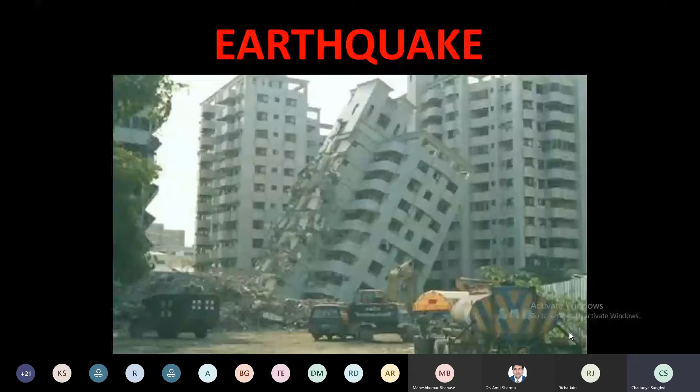So first we start with the disasters. We came across lots of disasters, and during this training program you will be given many lectures on different disasters. We talk about earthquake, cyclone, flood, fire, landslide, liquefaction, tsunami. These are the disasters. We can list them out as either man-made or natural, right?

Most of the time we say that earthquake is a natural disaster, right? But if an earthquake hits your region, what exactly will you do? When earthquake hits your region, you will come out of your houses, your offices, your structures. So you try to come out of your building. What is the reason behind it? The reason is that we have a fear in our mind that the building will collapse and casualty may happen.

Where do you go? You go to the open space. This open space is nothing but nature. So if we say earthquake is a natural disaster, definitely you will not approach nature. Just imagine if a cyclone hits the region, what exactly will you do? When cyclone hits the region, you will remain in your house, right? Because cyclone is a natural disaster, you will wait some time until it subsides, and then move out, because cyclone is a natural disaster.

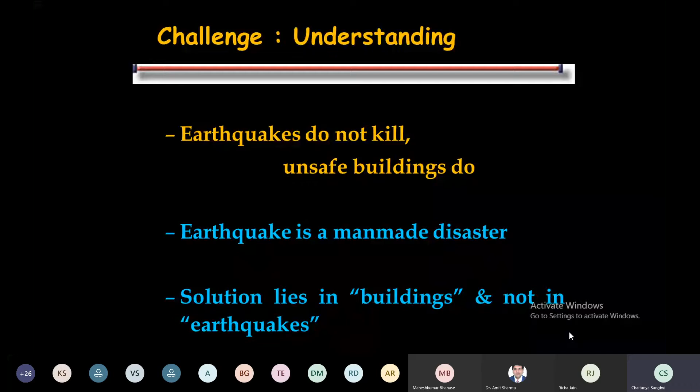So we have to develop the understanding that earthquakes do not kill, but unsafe buildings do. So we have to focus on the building, make our buildings safe, and reduce the casualties, right? And if you look at all the disasters, you will find that among them, the maximum loss of life and maximum economic loss is observed during earthquakes, and therefore it is very important for us.

The reason is we can predict flood. We are able to predict flood, and therefore, before any event happens, the people go to safer places. But at the same time, their property cannot be prevented from the flood, so their property may be affected - economic loss is higher, but loss of life is less.

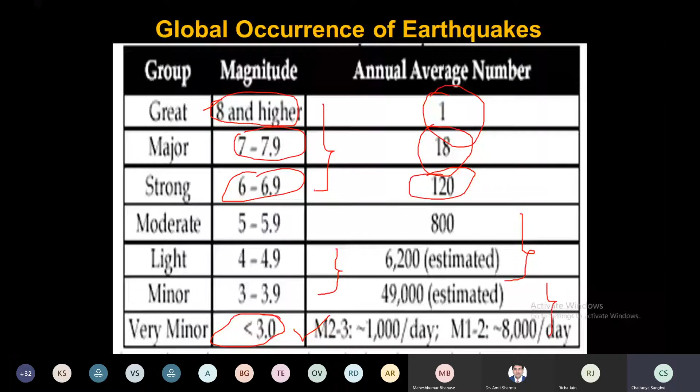But we are not worried about these earthquakes. The reason is the amount of energy released in these is very less, and our structures are able to absorb that energy, so we are not worried about small earthquakes. We are not much worried about the moderate earthquakes either, but we are worried about those whose magnitude is more than 6. So basically, we can conclude from the global occurrence of earthquakes that big earthquakes are rare, moderate earthquakes are occasional, and small earthquakes are frequent.

Suppose I'm taking a very simple example, when we design our structures for a certain period of life. For example, we design our structures for 100 years. Now I'm taking a simple example of a building located in the Bhuj region of Gujarat. I'm talking about the Bhuj earthquake or the Kutch region. Kutch is in Gujarat, right?

And I'm talking about two buildings or two structures. One is constructed in 1818, and another in 1820. We know that there was a great earthquake in Kutch in 1819, and as far as this region is concerned, the next earthquake took place in 1956, Anjar. So the gap between the two successive earthquakes in this region was almost 130 to 140 years.

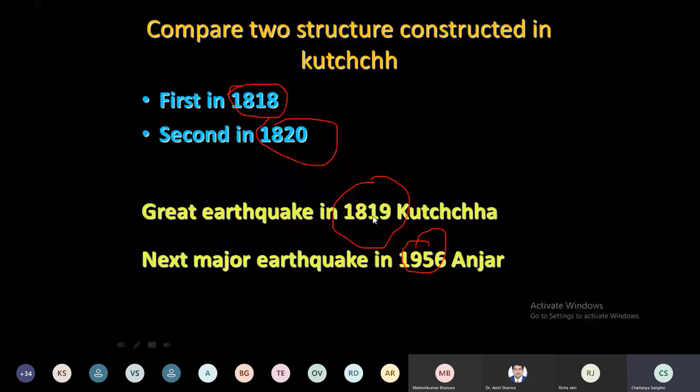Now we are taking the two structures: one constructed in 1818, another in 1820. Assuming a life of 100 years, the first structure constructed in 1818 will expire in 1918. Now if you look at how many earthquakes it observed, we know the earthquake took place in 1819. It means the building constructed in 1818 observed a great earthquake immediately after its construction.

So if we ask this building what we should do as far as earthquake design is concerned, it will say you have to go for the earthquake-proof design. Earthquake-proof means no damage condition, no damage. It is safe, but this is uneconomical because the sections are very large, our structural elements are much bigger. So as far as structural elements and cost are concerned, our structure becomes uneconomical.

Suppose I take the other structure, constructed in 1820. This structure will expire in 1920. How many earthquakes did it observe? Because we know we had an earthquake in 1819 and the next earthquake was in 1956, during the life of this structure it has not seen any earthquake.

So if we ask this building what we should do, the building is not knowing about earthquake, so it will say there's no need of designing the structure for earthquake because this building has not observed any earthquake. But if we do this, then when an earthquake comes—because we are not sure whether it will come or not—when it does come, it will also collapse, and it is unsafe. So as a civil engineer, we never design unsafe structures.

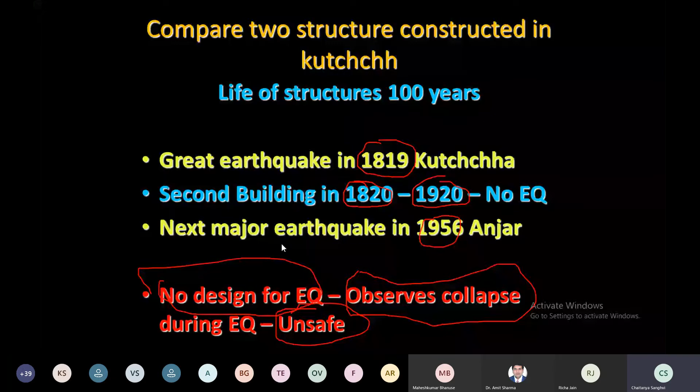So we have to go for earthquake-resistant design. Earthquake-resistant design means damage is expected. Suppose we cannot say my building will not see any earthquake. If we take the case of the Gujarat earthquake, we had an earthquake in 1819. The next earthquake was in 2001. That means almost 180 years gap between the two big earthquakes. Now if I imagine that the next earthquake is going to come after 180 years, no, that is not correct.

The whole earthquake engineering is based on probability. The probability means an earthquake may come tomorrow morning also. You have to be ready for that. But the probability of having a big earthquake next morning is very less. And therefore we are taking the chance. We are making our structure safe, but at the same time we are expecting damage.

Damage means what? If an earthquake comes, damage takes place, and then we have to retrofit that building or we have to repair that building. So we have to imagine that if an earthquake comes, a big earthquake, then we have to repair or retrofit our structure. That is what is required. So this is what the philosophy is.

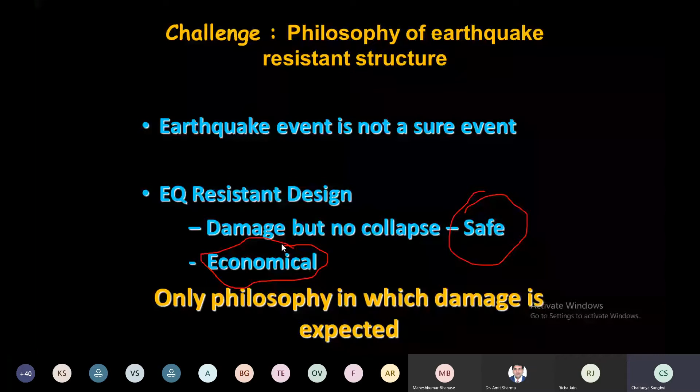In case of a minor earthquake, we are expecting damage in non-structural members, not in the structural members. In moderate shaking, we are expecting some damage in the structural member and heavy damage in the non-structural member. But in case of strong shaking, we are expecting very heavy damage in the structural members. Remember, we are expecting more damage in the structural members.

But collapse is not allowed. This is the bottom line. Collapse is not allowed under any circumstances. Remember, this is the bottom line.

So if you look at the philosophy of earthquake design, it simply says that under minor but frequent shaking, we generally observe non-structural damage, not structural damage. Structural damage means damage to members which transfer loads of the structure, which are designed to resist loads. Non-structural members are used for functional purposes. Like in an RCC structure, the load of the slab transfers to the beam, the beam transfers load to the beam-column joint, then column, then foundation, and to the soil.

The non-structural members are the walls. Generally, the walls are used for the functional purpose. They are infill walls. The purpose is not that they will take the load.

So under minor shaking, which is frequent, we expect repairable damage in the non-structural member. Remember, non-structural member, but no damage in the structural member. But when an earthquake of magnitude maybe 4 to 6 comes, then there may be damage in the non-structural member and repairable damage in the structural member.

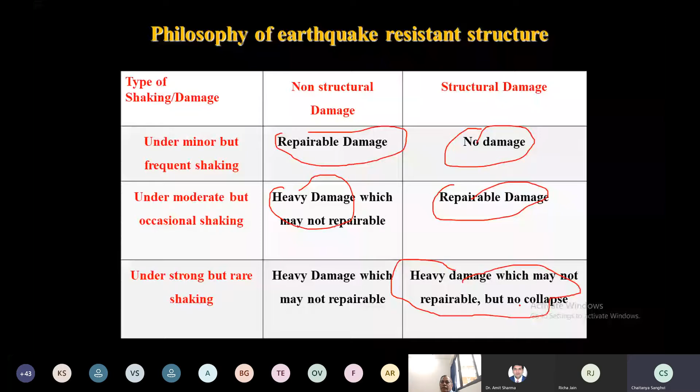So the difference between earthquake-proof design and earthquake-resistant design is that in earthquake-proof design, we design our structure for the maximum expected force and for the no-damage condition. Here we rely on elastic deformation. It is safe, but it is uneconomical.

Here ductility is not required. But in earthquake-resistant design, we design for maybe 20-30% of the force, and we rely on inelastic deformation. We design our structure such that it will absorb the earthquake energy. So we are relying on inelastic deformation, which means ductility, and ductility definitely relates to damage.

So here your structure is basically safe. Remember, the structure is safe, but at the same time it is economical. The only thing is that you have to be ready for retrofitting in case of major earthquakes. That's all - this is what we discussed as preliminary things.

If you look at the actual scenario of what happens in any earthquake, whether in a developed country or developing country, buildings collapse. In developing countries, more buildings will collapse; in developed countries, fewer buildings will collapse.

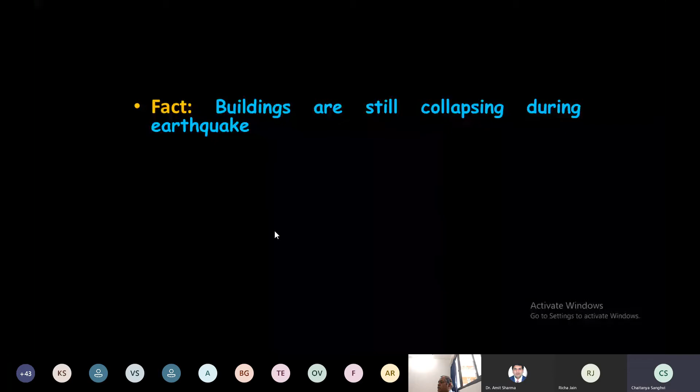In developing countries, the number of deaths will be high compared to developed countries. This is generally observed, whether it's the 1994 Northridge earthquake, the 1995 Kobe earthquake in Japan, the 1999 Turkey earthquake, or the 2001 Bhuj earthquake. Everywhere we have seen devastation, more so in cases like Turkey and India.

If you look at Japan in 1995, most of the bridges were affected, and in the 1994 Northridge earthquake, it affected structures too, but quite less compared to India.

So now we come to our main topic. Earthquakes are uncontrollable - this is a fact. We cannot control or prevent earthquakes from happening, and at the same time seismicity is increasing. So we have to design our structure such that capacity is more than the demand. Then your structure remains safe.

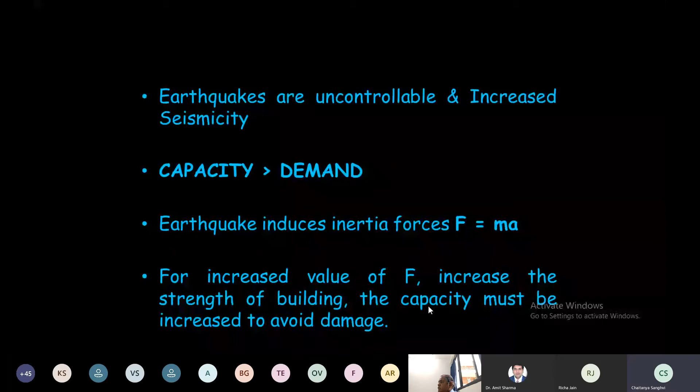We know the earthquake induces force, which is mass into acceleration. So if the value of F increases, meaning earthquake force increases, we have to increase the strength of our structure and design it for a higher level. So we have to increase the capacity - capacity should be more than demand.

So there are two things. Again, capacity means whether we go for elastic design or inelastic design. We rely on elastic deformation or inelastic deformation - which is more important? Here we basically rely on inelastic deformation, and here we are not observing strength-based design, but rather we rely on ductility, meaning the area under the curve.

We calculate the forces like this as far as the Indian code is concerned. We calculate the design lateral force at each floor level, and then we design our columns or our supporting system for that. Now, basically, this earthquake force acts in all three directions - two horizontal directions and one vertical direction. Now which component is important for us?

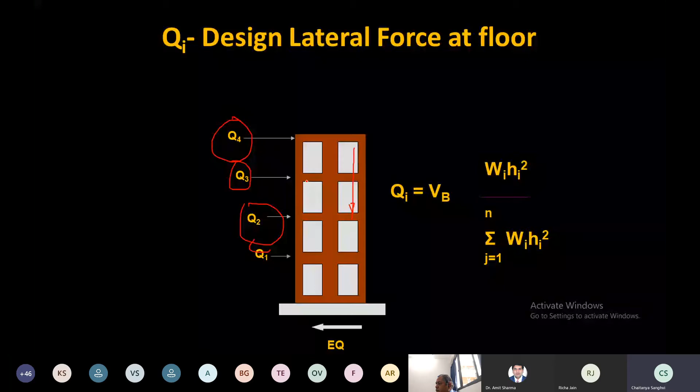The important part is, we have to transfer horizontal load in vertical direction, and therefore your structure is uncomfortable. Imagine you are holding a bag on your head, you are comfortable, right? But suppose you are holding your bag by keeping your hand at 90 degrees with your body, then you are uncomfortable because we are transferring force in a very awkward way.

So here the same thing: this force is acting in the lateral direction, and we have to transfer it in the vertical direction. Therefore your structure is not comfortable because our load transfer member is located in the vertical direction.

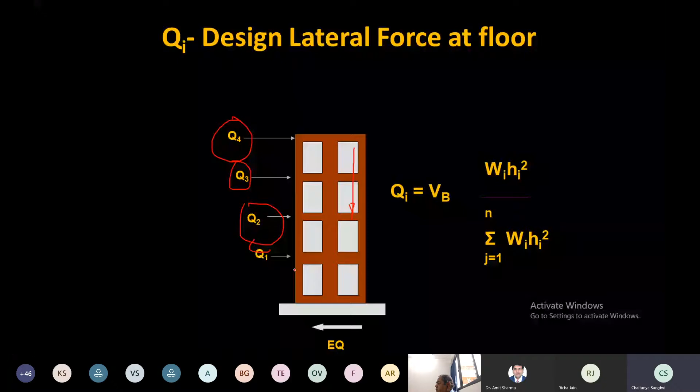Now, which are the lateral load resisting systems? Generally we rely on shear walls, bracing systems, MR frames, and tubes. These are the normal lateral load resisting systems we use.

What is a shear wall? The shear wall is basically a structural wall. But we are saying it is a shear wall because the structural wall may be a shear wall or a flexural wall. The shear wall means the design of this wall is governed by shear deformation, not by flexural deformation.

In most cases, if we put a shear wall, it means it's a vertical concrete wall with reinforcement in the vertical direction. The shear wall is a wall designed to resist the lateral force acting in its own plane, and shear deformation is the main thing we are designing for, not flexural deformation.

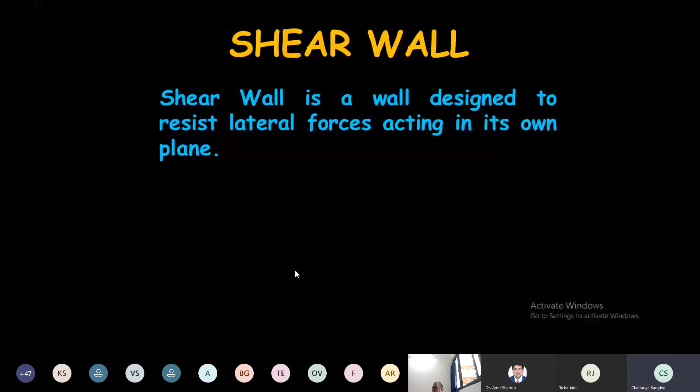This you are knowing, I'm not going to discuss that part, but this is shear wall reinforcement. You can look at the shear wall, how it is constructed after the earthquake. This structure was damaged due to the earthquake, and later they introduced a shear wall in the existing structure. You have to be very careful that this shear wall must be connected with the columns and beams correctly, then load transfer will take place. Otherwise it will not become effective.

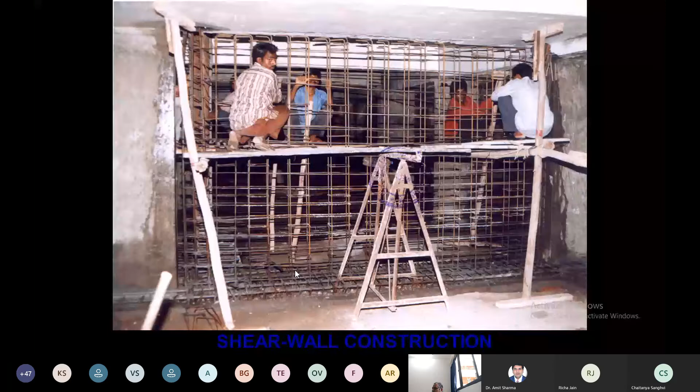The bracing system can be used to stop a building from swaying over. Generally bracing is provided in steel structures; in concrete structures we provide shear walls. The purpose of both bracing and shear walls is to increase stiffness and make your structure stiff. Since earthquake load distribution is as per the stiffness of the vertical element, we try to prevent larger deformation.

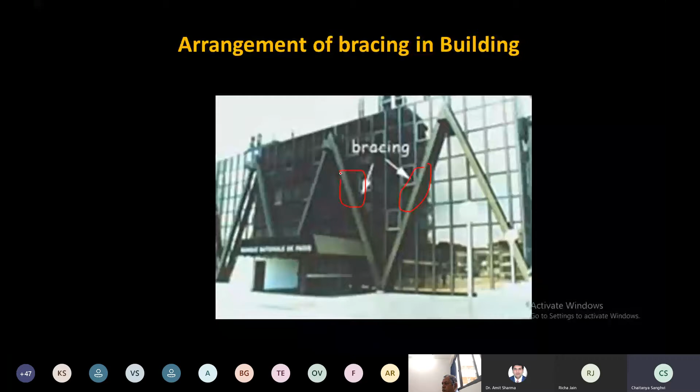So bracing systems are provided, where the members are either in tension or compression. This is a bracing system which is provided. Earthquake force is acting in the lateral direction, and we are providing an element which is inclined. This inclined member will transfer earthquake lateral force much better as compared to the vertical member. This is a bracing system. We have special concentrically braced frames or eccentrically braced frames, depending on the case.

So we are saying that earthquakes are natural, and as far as the effect of earthquake is concerned, we have to control the damage in the structure. We have to control the consequences, because of our technological advancement.

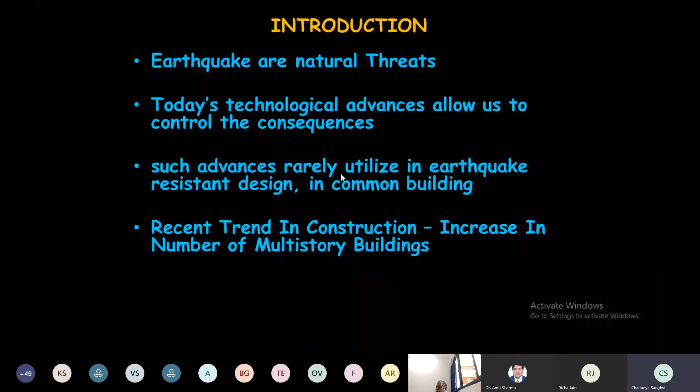If you look at the recent trends, we are going for very high-rise multi-story buildings. The governing equation is inertia force plus damping force plus stiffness force - this is the case of free damped vibration. Now, if you want to control the excessive vibrations, generally we increase the stiffness.

And correspondingly, the mass may increase, which is generally not feasible for tall structures. So to reduce excessive vibration, we switch over to damping. If there is more damping, it will absorb more energy.

So basically, if you want to control vibration, we have three parameters: mass, damping, and stiffness. You can reduce the mass because we know earthquake force is mass into acceleration. If you reduce the mass, earthquake force will reduce, so if you make your structure lightweight, it is good - earthquake force will reduce.

The second part is you increase the stiffness, so the deformation may be controlled. But when you increase the stiffness, the size of the vertical member becomes very high, so again we have to control the sizes of the structural elements.

And the third element is damping. Damping is very important, and you have to increase the damping. For steel structures, we assume 2% damping. If it is an RCC structure, it is 5% damping. If it is masonry, it is around 8%. This is nearby what we assume - so the masonry structure absorbs more energy compared to steel structures: 2% damping in steel, 8% in masonry, 5% in RCC.

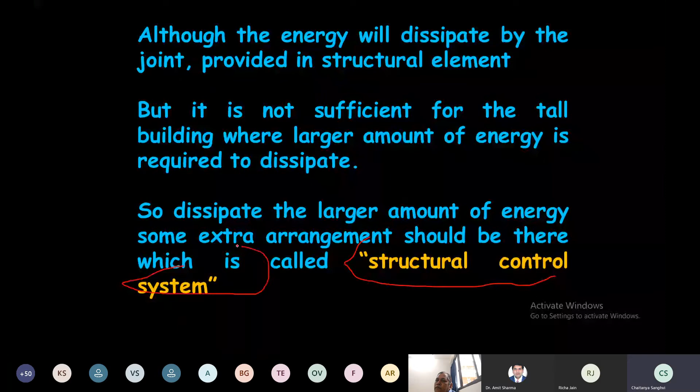This is structural control devices, or structural control systems, which are required. So what are structural controls? They mean incorporating external elements into the structure to control the dynamic response - we are introducing new structural components into our structures which will control the dynamic response, meaning when an earthquake comes, it will control the vibrations.

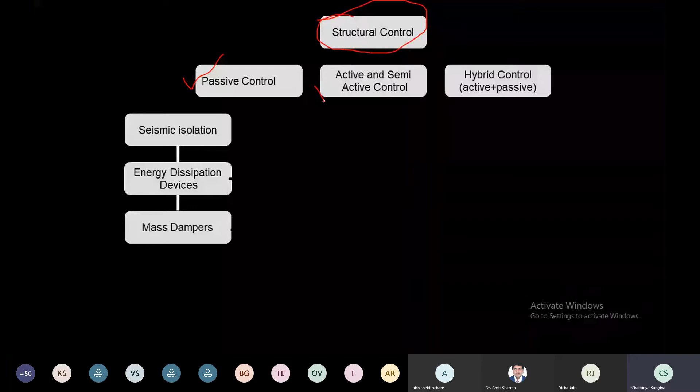And which type of structural controls are we talking about? There are different types: passive control, active or semi-active control, or hybrid control.

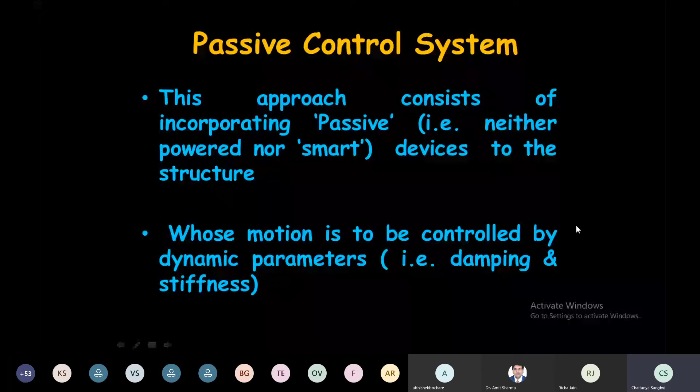And we are playing with the damping and stiffness - basically we want to control the vibration. So passive control requires no external energy; energy is not required. We are putting in structural elements, and we have to select a structural element, or introduce an element, according to the situation. We'll see exactly what it is.

So first we talk about the base isolation system. Base isolation system - what is base isolation?

We go to the behavior of our structures during earthquake. During earthquake, what is happening? Energy will release, and this energy will travel in form of waves. These waves will shake the foundation. When the waves shake the foundation, your structure is basically at rest. As per Newton's law, a body at rest will try to remain at rest, so it will exhibit the inertia force, and this inertia force is the earthquake force.

So when earthquake shakes the foundation, your building will vibrate in horizontal and vertical direction. Here we are talking about the horizontal, lateral direction. This energy is entering into your building, and your structural components undergo deformation, but this structural component has limited deformability - it can deform only up to a certain limit. If it deforms more than that, damage will be observed.

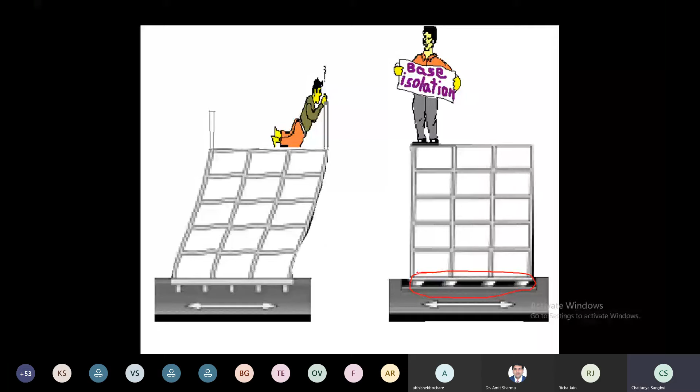So what is actually base isolation? We'll discuss that. If you talk about high seismic zones, we can observe acceleration more than 1G. Designing our structures to this level of force is not easy or cheap. Therefore, as far as our code is concerned, it basically uses ductility to reduce the capacity and to achieve the capacity.

So as far as our code is concerned, it relies on ductility. Which code am I talking about? I'm talking about the IS code, IS 1893. IS 1893 is having five parts right now. Part one is for buildings - I'm talking about buildings right now, not discussing bridges, embankments and others. But the most important thing is that IS 1893 part 6 is coming.

The draft code is there, and this is particularly related to the base isolation system. So India is ready for the base isolation system. The code is already there, and maybe within a year or two we'll have a code for base isolation even. Right now, if you talk about IS 1893 parts 1 to 5, basically they talk about ductility to save our structures.

But I told you earlier that ductility means what? Inelastic deformation - what is inelastic deformation? It's nothing but damage. It means once a big earthquake comes, your structure and elements will absorb damage, and when your structural element absorbs damage, its capacity will reduce, and then you have to retrofit your structural elements. Therefore, if we want to prevent our structural elements from undergoing damage, the solution to this is basically a base isolation system.

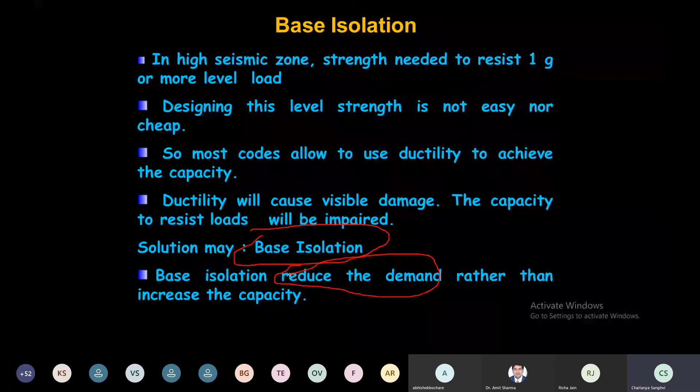Again, for earthquake we are designing our structures to absorb - basically we are designing structures such that they will absorb the earthquake energy. Our earthquake design is not a strength-based design. Remember, I'm repeating - our earthquake design is basically based on energy absorption. And here, the base isolators are reducing the demand rather than the capacity.

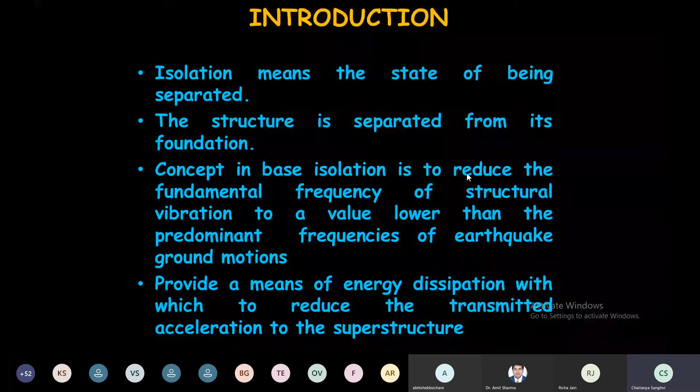So what is the purpose of base isolation? We know that hospital buildings, school buildings, fire stations, institute buildings, TV stations - these are very important buildings, known as lifeline structures. This structure should remain working during the major earthquake event, and it should remain functional after the earthquake. This is important, and therefore base isolation is important.

Reduction in seismic force is very important for us. As far as base isolation is concerned, it reduces the seismic force as compared to conventional structures, and it is said that almost 60 to 70% force can be reduced using base isolation. It means the demand is reduced. So the objective is to protect structures from severe damages during strong shaking.

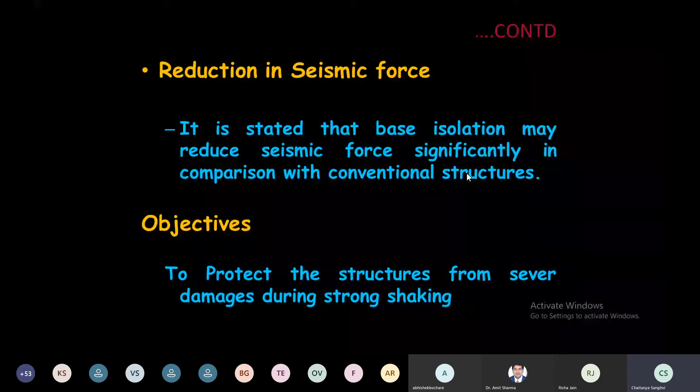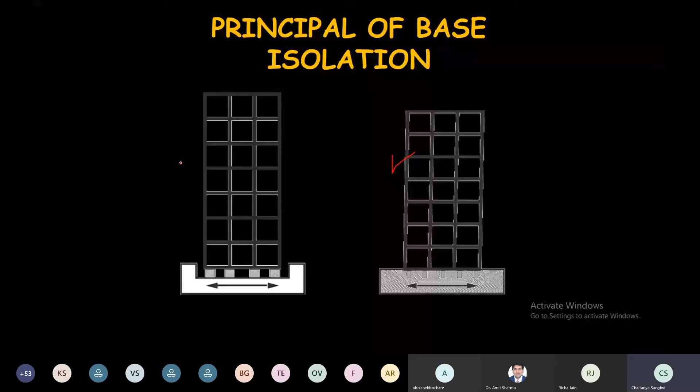Now you can see how the structure is vibrating. This is very important. Here you can have an interstory drift. In this case you have an interstory drift, while here the interstory drift is gone - it is not there at all. So this is the advantage of the isolators.

Again, in the first case you have an isolator here, and because of the isolator, the superstructure almost has rigid deformations. While in our normal structures, if you look at the interstory drift, you can observe these two parts. Just look at this - this is very important.

So basically, what is an isolator? It consists of a setting device which is flexible in the horizontal direction and very stiff in the vertical direction, because we have to make this isolator in such a way that it will transfer the dead load and live load quite effectively. Since they act in the vertical direction, they must be stiff vertically. But the earthquake lateral force acts in the horizontal direction, so it must be flexible - we allow deformation in the horizontal direction. It is located between the foundation and the main structure.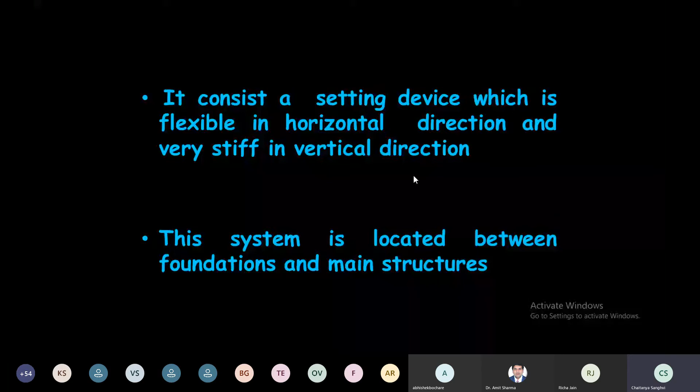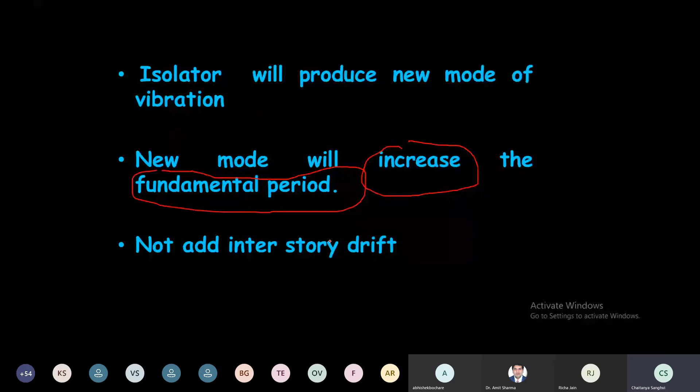So what are the advantages of base isolation? Basically, you are separating the frequencies. What is resonance? Resonance means the frequency of the earthquake matches the frequency of the structure, and then resonance occurs - meaning your structure gives a larger response. Simple: if you like ice cream and I offer you ice cream, your response will be high. Same way, if the earthquake supplies the same frequency as the structure, your building will respond greatly. By using this base isolator, we are separating the frequencies, avoiding resonance.

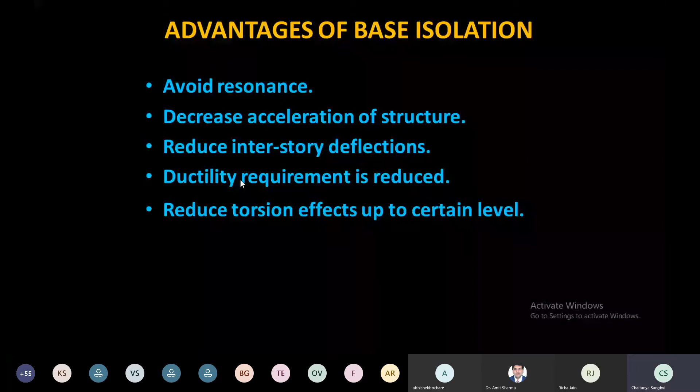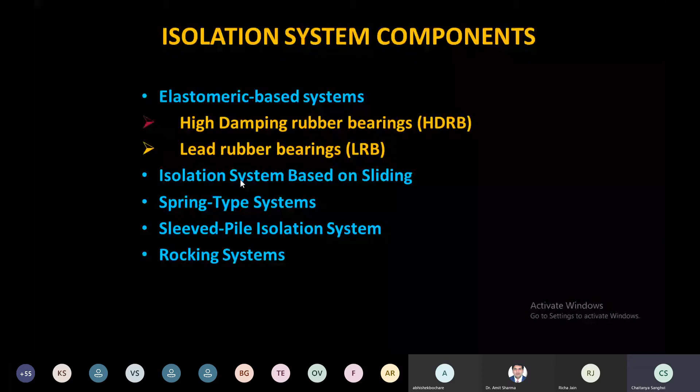Basic element of flexible mounting or energy dissipator - we'll see that part. Basically, the type of isolation system - we have different types of systems. We have elastomeric based systems like HDRB or LRB, meaning high damping rubber bearings or lead rubber bearings. We have isolation systems on sliding base, spring type systems, sleeved pile isolation, or rocking systems. Various types of isolation systems are available, so we will see this.

This is a system which is very flexible in the horizontal direction, capable of transferring vertical load. So first we talk about the elastomeric bearing, which is the most popular right now.

It consists of thin rubber and steel plates. If you look at this, the rubber layers are inserted between the steel plates. What will the steel plate do? The steel plate will give you stiffness in the vertical direction. It will transfer the vertical load and prevent bulging of the rubber - it literally constrains the rubber sheets. And what will the rubber do? When you introduce the rubber, it allows horizontal flexibility.

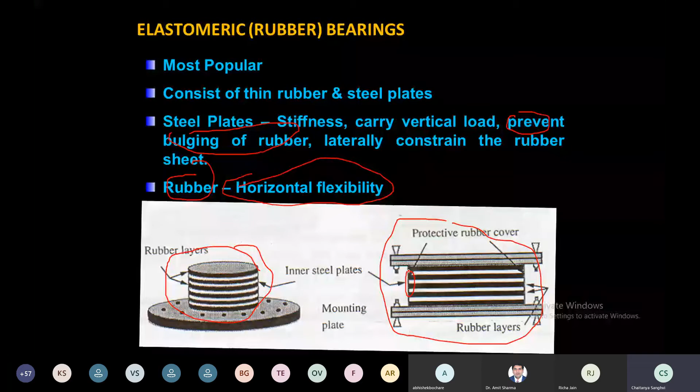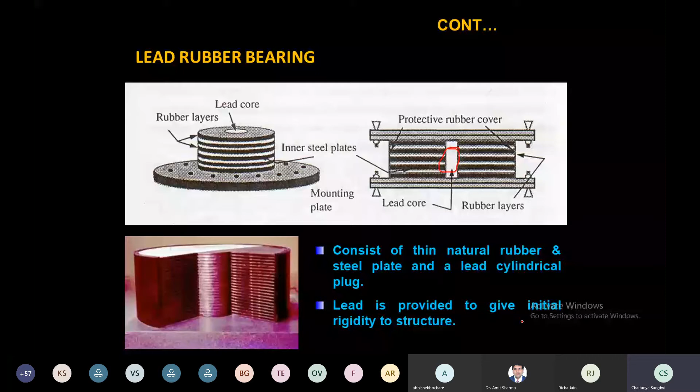The lead rubber bearing means we are using rubber layers with steel plates, but at the center we are using lead. So natural rubber, steel plate, and a lead cylindrical plug. This is providing the initial rigidity to the structure - that is the reason we are introducing it. You can see the better view - these are the steel plates and the rubber, steel plates and rubber here, and the central part, which is the lead, in the lead rubber bearing.

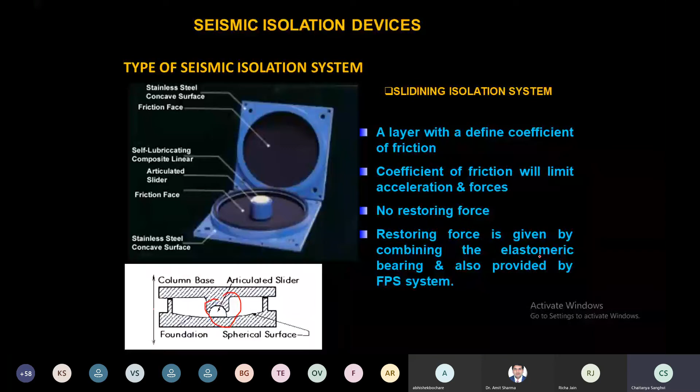We have a different type - the sliding isolation system. In sliding isolation system, you can see here this is the base plate, and this is the column base, and here this is a slider. This is the surface on which it will slide. So a layer with a definite coefficient of friction will limit the acceleration and forces, but here no restoring force will be there. So restoring force is given by a combination of the elastomeric bearing and also by the friction pendulum systems.

The isolation in a real building - if you look at the Bhuj hospital. You'll be surprised that in the 2001 Bhuj earthquake, the government hospital building in Bhuj collapsed. At that time, the Vajpayee government was there, and they sanctioned 100 crore rupees for the hospital, and a new hospital building was constructed in Bhuj. The cost of that hospital building was 100 crores, and out of these 100 crores, 10 crore was the cost of the base isolator - you see, 10% is the cost, which is quite high.

The reason is India is basically using isolators, as far as this building is concerned, from New Zealand, and we are not actually using it effectively. When it comes into routine use, the cost of isolators may reduce. But as far as India is concerned, we have few buildings with such isolation systems - right now maybe 8 to 10 structures in India which are isolated. So Bhuj was the first big structure which was isolated.

Before that, in 1993, there was the Latur earthquake. Latur is in Maharashtra, known as Kilari. So after the Latur earthquake, the first building was introduced in India with a base isolation technique. Today, as far as the world is concerned, we have more than 1,000 buildings in the world which are isolated - a very effective technique, and the performance of these buildings was observed to be wonderful during earthquakes, performing excellently well.

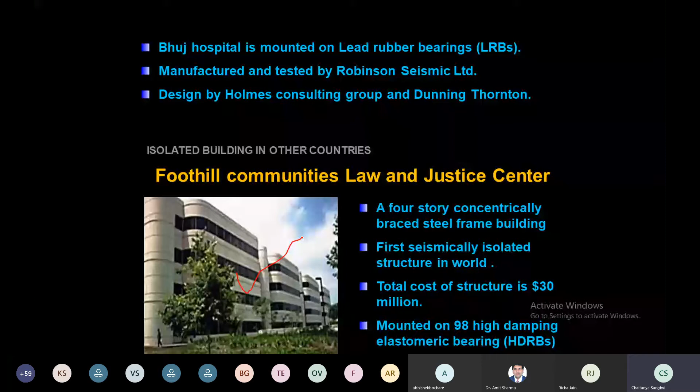This is the Foothill Communities Law and Justice Center. It's basically a 4-story concentrically braced frame. This is the first seismically isolated building in the world. The total cost was almost 210 crores, meaning $30 million, and it is mounted on 98 high damping elastomeric bearings, HDRBs.

We go to the next part: tuned mass dampers. What is a tuned mass damper?

Basically, we are adding certain mass to our structure. We have our main structure, having certain mass. Now, frequency is basically 1 over 2 pi, square root of K by M. So it depends on stiffness and mass. Again, the frequency is 1 over 2 pi square root of K by M, depending on stiffness and mass.

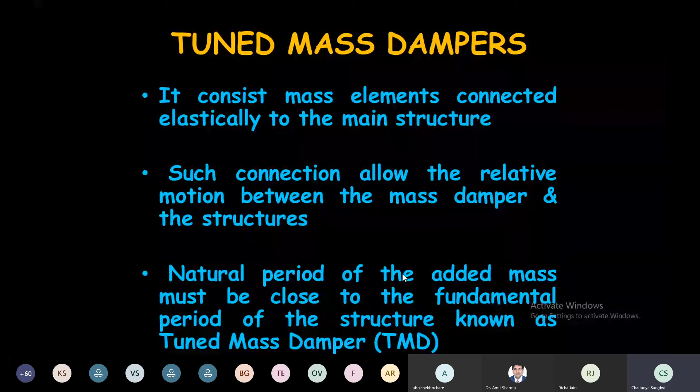So your main structure has certain mass. If you play with additional mass, you can change the frequency of your structure. So what exactly are we doing? We are introducing certain additional mass into the system, and the natural period of this added mass should be close to the fundamental natural period of the structure. So it is called a tuned mass damper. The purpose of a tuned mass damper is to reduce the horizontal vibrations of tall and slender constructions.

Let's talk about damping. What is damping? Damping means the capacity to absorb energy — it's the energy absorption capacity of the system.

And what is a tuned mass damper? A tuned mass damper is a single degree of freedom oscillator attached to the structure for the purpose of reducing resonant vibrations.

What exactly is the system? You see, this is your main structure, and you are adding certain mass to it. It is designed in such a way that you change the frequency of your original structure — you are tuning the mass in such a way.

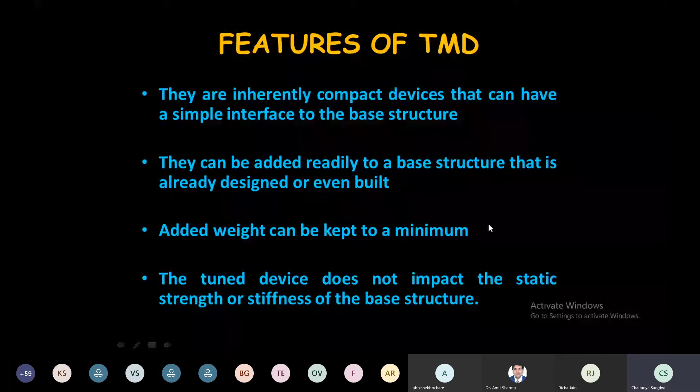Basically, this mass is added to different levels, and this mass is generally kept to a minimum. When we are tuning the mass, it doesn't impact the static strength or stiffness of the base structure. This is the most important part.

Now you can understand what we are actually doing. We have a main structure, we introduce additional mass to change its frequency. So whatever the predominant frequency is, the structure will shift to a different frequency, and they will not resonate. That is the most important part.

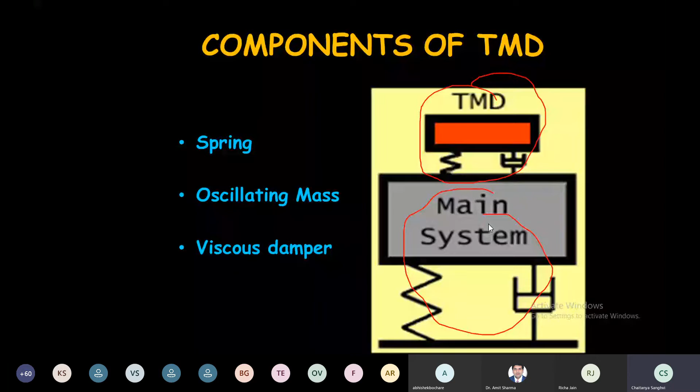So how does it work? You can see here — we are putting additional mass. This is a sketch of our original structure, having certain mass and stiffness.

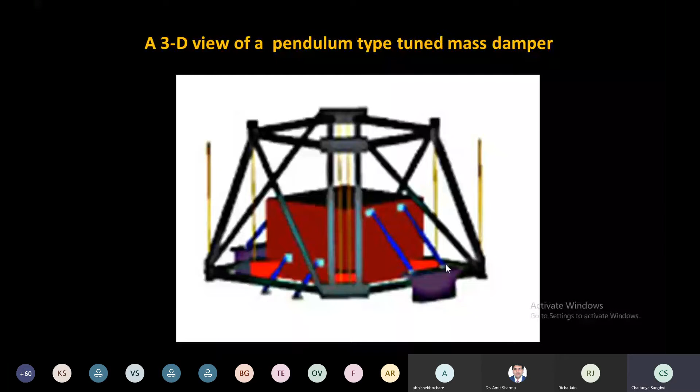You see, this is an actual view of a pendulum-type tuned mass damper that is provided. When the structure vibrates in one direction, the damper goes the other way, trying to reduce the vibration. If the structure moves to the right, it moves to the left, and tries to control the vibration.

Basically, a TMD is a system of spring and mass, tuned exactly to the structure's natural frequency. Due to the physical properties of the system, the damper moves out of phase — if your structure moves towards the right, the mass moves towards the left; if the building moves east, it moves west, trying to control the vibration.

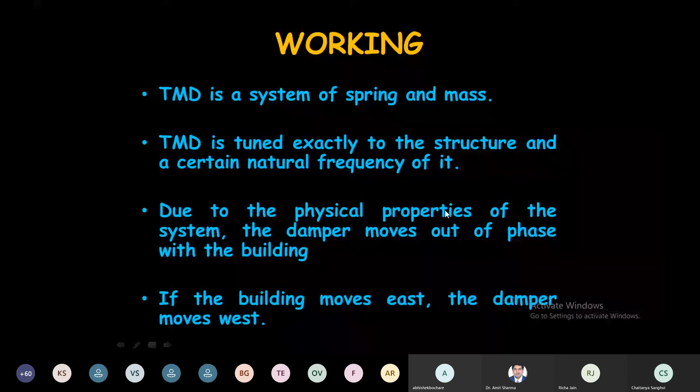Tall and slender freestanding structures tend to get excited dangerously by wind. When we compare wind and earthquake, the earthquake carries different frequencies, but wind acts on a structure with a certain frequency, in a very narrow range. So when this wind induces a lateral force, the TMD (tuned mass damper) will be helpful.

This is basically used in the Petronas tower, where it is introduced and this tuned mass damper is placed. If the structure moves towards east, this will move towards west and try to control the vibration. Design of a tuned mass damper is definitely very interesting.

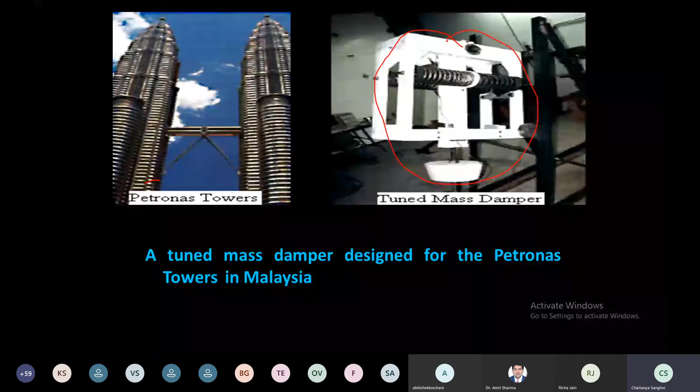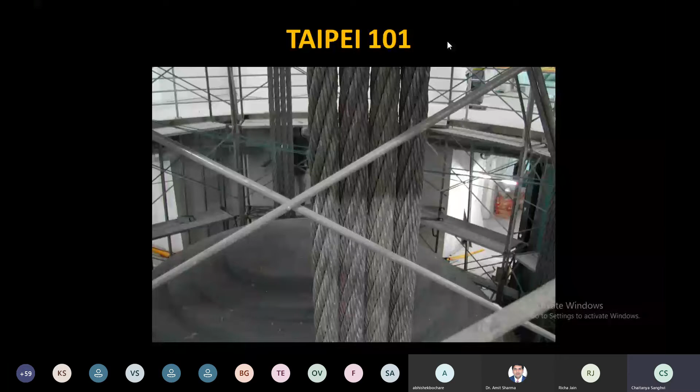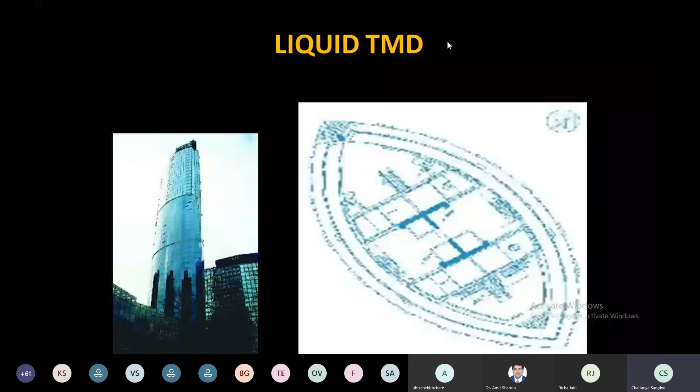Because of the shaking, the fluid will slosh, increasing the mass while the sloshing effect occurs. It is designed to control the vibration. This is particularly useful when wind vibration is present, not for earthquakes—it is less effective for earthquakes compared to wind. Now we talk about the various types of dampers, starting with viscous dampers.

We'll talk about viscous dampers, friction dampers, and viscoelastic dampers. But before that, I missed one slide.

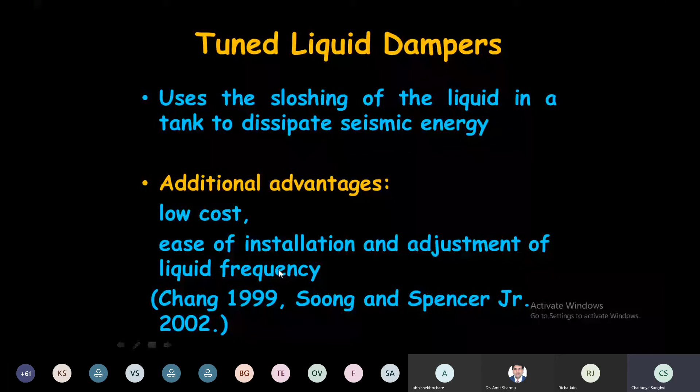Tuned liquid dampers use the sloshing of liquid in a tank to dissipate seismic energy. The advantages are low cost, ease of installation, and adjustment of liquid frequency—this is in our hands. These are the advantages of tuned liquid dampers.

In Japan, they were first used in airport towers and tall structures. The most important part is that tuned liquid dampers are very effective in reducing wind-induced responses, up to 70%. This is very important—these systems are more effective for wind compared to earthquakes.

At the same time, it is also observed that tuned liquid dampers are less effective compared to tuned mass dampers. So generally, people say that tuned mass dampers should be used instead of tuned liquid dampers.

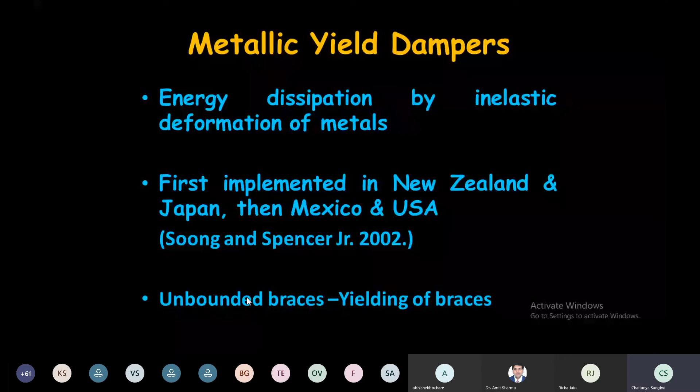Now we talk about metallic yield dampers—energy dissipation by the inelastic deformation of metals. We introduce certain elements into the system, similar to using an MCB, like when an electric circuit has circuit breakers.

What does it actually do? When excess supply occurs, it breaks the path of electricity and keeps the system safe. With a fuse, what we use is that the fuse sacrifices its life. The same way here, we introduce a sacrificial element—you can see this is the element we are introducing, placed here.

This is the system. What exactly is this? It is basically made up of ductile material, so during lateral movement, deformation of this element takes place. Being ductile, it will absorb energy, and the strength of this element is such that it will sacrifice its life before our structural element does.

So what happens is our beam and column will not observe damage, but this metallic yield damper will sacrifice its life. It works as a fuse—being ductile, it absorbs more energy, and this is what we need.

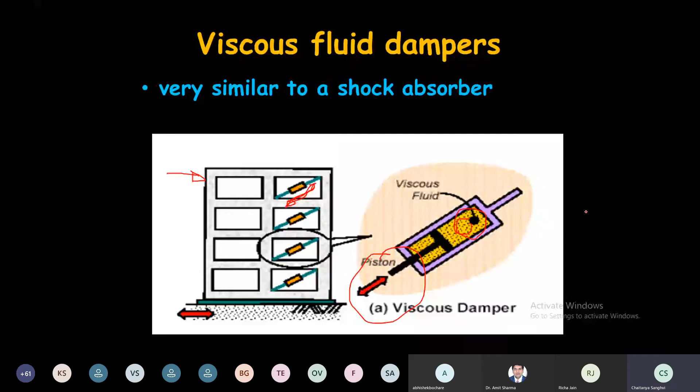We have such a system in our vehicles also, a shock absorber, which works on the same phenomena. So we introduce such things so they absorb a large amount of energy. It's a viscous damper, meaning it increases the damping of the system. You can see the sizes of these dampers in real structures, much bigger than in our vehicles, and we design for it.

We also have friction dampers. Friction dampers mean that when lateral movement starts, we use an element which will offer friction. More friction is generated, and friction means resistance, and because of the friction it will try to dissipate the energy.

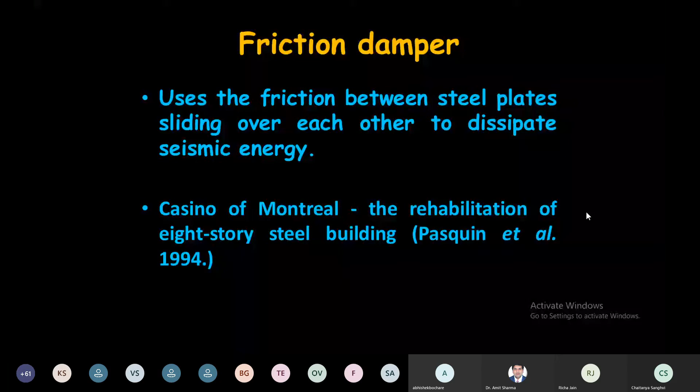This is an 8-story steel building, the Casino of Montreal, which was rehabilitated. In a friction damper, we introduce this additional part somewhere, and when lateral movement starts, the whole assembly will try to move. There is friction between them, and they absorb the energy.

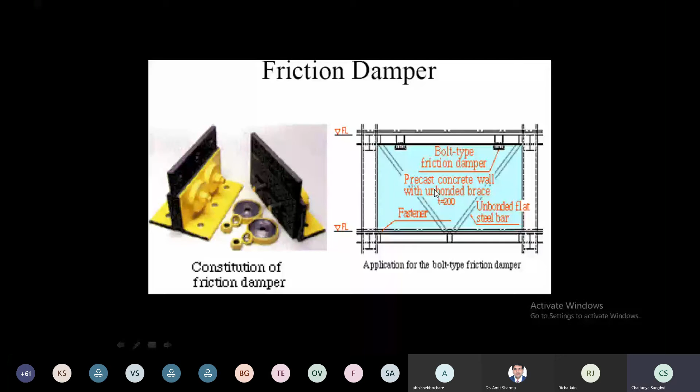It can be introduced in many configurations. This installation may be like this, or like this, or like this. It depends - if we have a window here, we can introduce it like this; if we want the central portion free, we can introduce it like this. So it depends on the requirement.

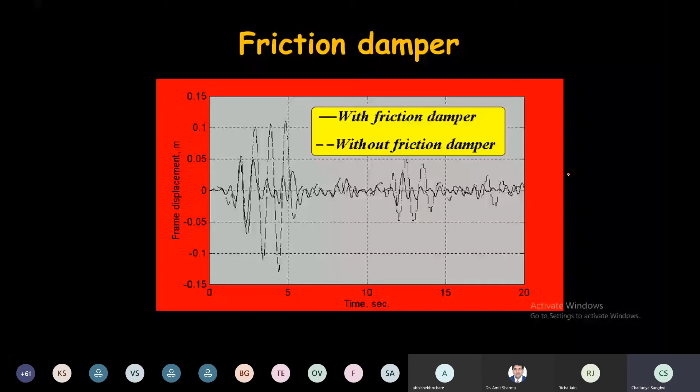If you look at this, the response with the friction damper is quite reduced compared to a system without a friction damper. The main advantage of the friction damper is it has very high energy dissipation and a controllable friction force. Compared to yielding of metals as an energy dissipator, it possesses a greater capability of absorbing energy, since yielding of metals has certain limitations. Here we can have better performance.

Disadvantages include larger fatigue, and its durability is also controversial.

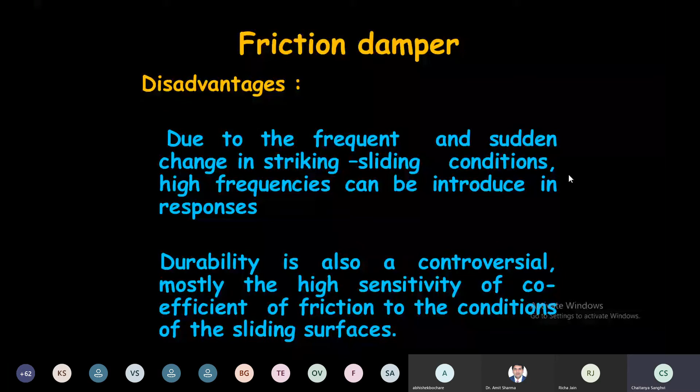Sharma sir? Yes sir, we have 10 more minutes for this session. So we take active control a little fast and just try to tell what active control is. Okay.

Now the passive control - I told you what passive control is. The passive control means the system remains within the structure, which is generally not used during normal circumstances, but when the earthquake comes it becomes active and gives the response, reducing the response of your structure.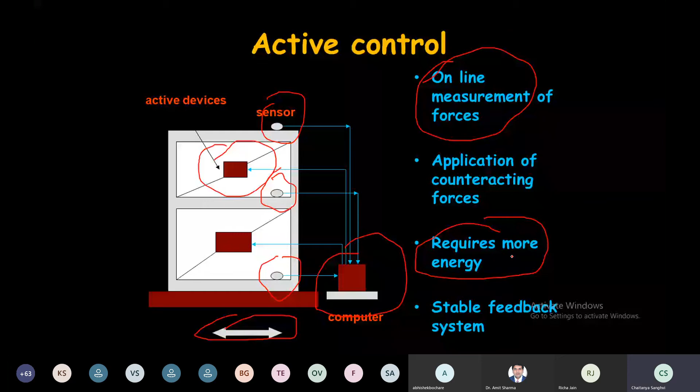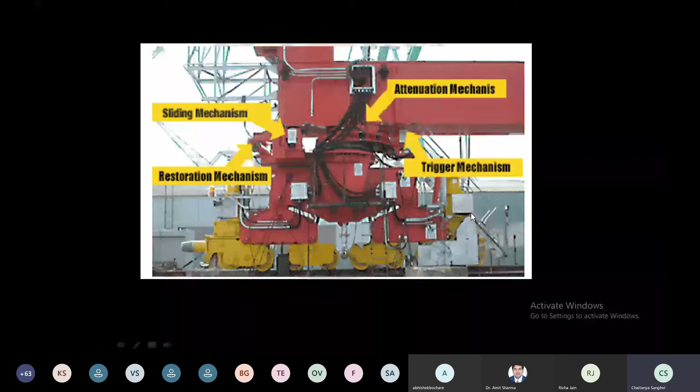Now you can see the system in reality. It is a huge system, made up of a number of components, so it requires considerable amount of energy, external power, tens of kilowatts.

Use measured structural responses to determine the desired control forces. It is more effective than the passive device because of the ability to adapt to different loading conditions. We have sensors which sense the deformation, determine the intensity of shaking, and the corresponding response is generated.

That is important, right? We generally say it's not reliable, suppose the continuous power supply is there. It is quite reliable, but not reliable because the large amount of power required for the operation may not always be available during the seismic event. This is the fact. If you don't have the supply during the earthquake, then this becomes obsolete, meaning it is not required. It requires the power supply; otherwise, it will be useless.

The cost and maintenance is significantly higher than passive control.

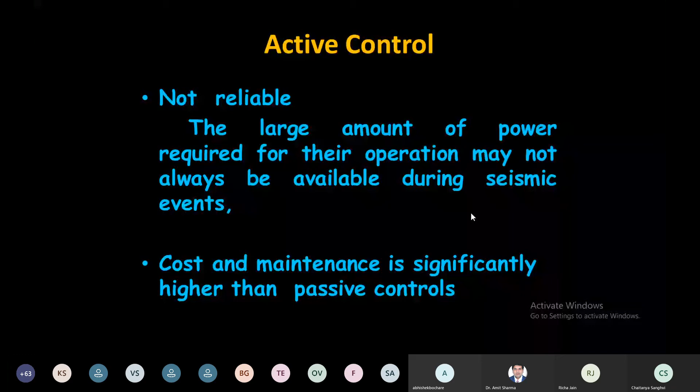Passive, we talked about tuned mass dampers. Here we talk about active mass dampers. It's similar to tune mass dampers, but it includes actuators that are used to position the mass at each and every instant. The actuator is used to increase the amount of damping achieved and the operational frequency range of the device.

Japan is very aggressive in using new technology. They keep on experimenting with new things. As far as India is concerned, I think we are quite passive in using such kind of structural controls. Even passive control is not used effectively in India.

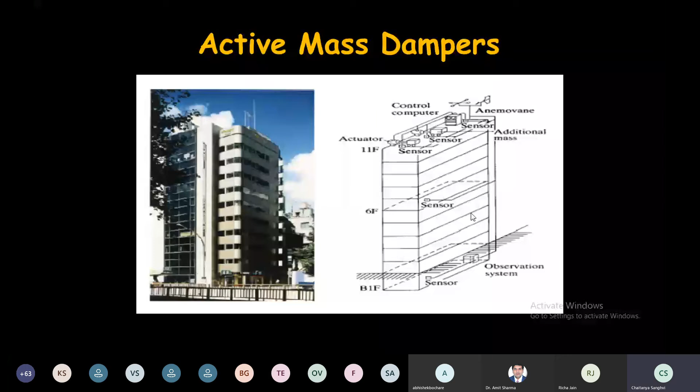This is the Applause Tower in Japan. It had used this system. They use multi-stage rubber bearings and actuators. You can see here this system, and here you can see the actuator which is used to control the vibration.

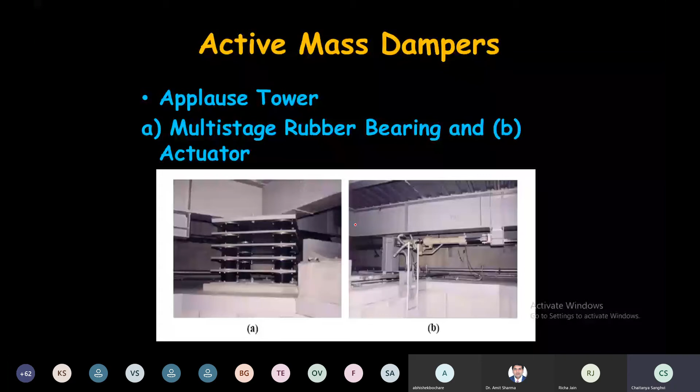Then you have a hybrid control system. Basically it is a series or parallel combination of an active or semi-active system with a passive one. So here we are mixing the active and passive both. What is the advantage of it? The advantage of the passive system and the advantage of the active system can both be combined, and we can have a better system.

So what exactly do we do? The passive device reduces the major displacement, and the active system can give the final adjustment. That is the purpose behind it. So it will reduce displacement as well as acceleration.

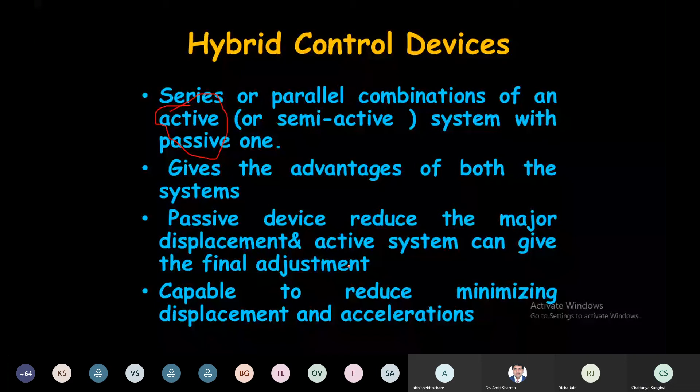This is Shinjuku Park Tower where the hybrid mass damper is used. If we see such a system, we get the idea how it works. Here you can see this is basically your building. You are putting the passive tune mass damper here. So the passive tune mass damper will control the response, and any additional control, fine tuning is required, which is done by this actuator, because the passive tune mass damper doesn't know what the frequency is. So final adjustment will be done because it is controlled by the computer system, digital.

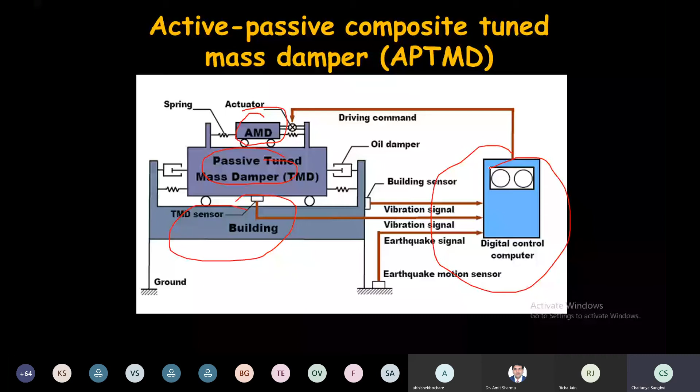This computer we are using in the active control system. So it keeps giving the response that the passive tune mass damper is controlling the deformation, and the fine tuning will be done by the active mass damper. So this is the combination of these two. I'm not going into detail of this now because our time is almost up.

We have a hybrid seismic isolation system. Here we go for controlling the base displacement of the isolator using active control. Because in passive control, when the shaking starts, the deformation of the various isolators is not controllable. Now here we can control it through an active system, so we are introducing this active control system to control the vibrations of the passive system.

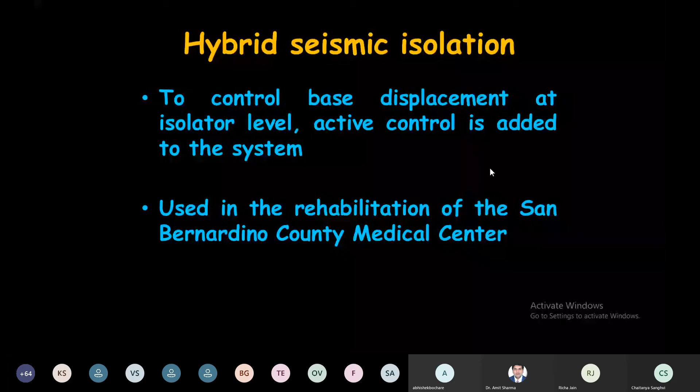Semi-active controls. Basically, it cannot inject energy into the control system, but the mechanical property can be adjusted to improve the performance. This is what semi-active control is. If you compare semi-active control and active control, the power requirement is quite less in semi-active control because we are not injecting energy into the control system. So mechanical properties are adjusted to improve the performance.

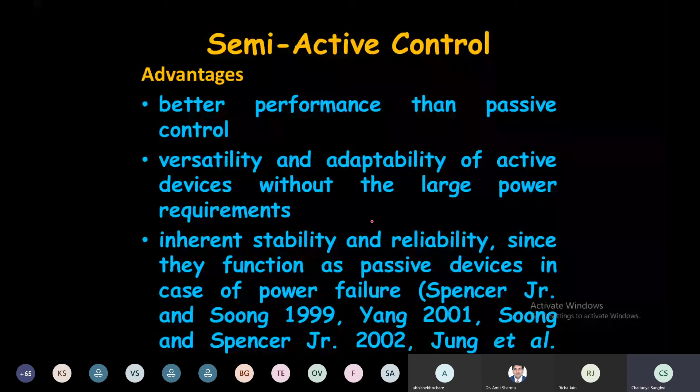So semi-active control has better performance than passive control, with the versatility and adaptability of active devices without the large power requirements. So the important part is the power requirement - a large power requirement is not required, and it has inherent stability and reliability, that is the advantage. We have semi-active control variable orifice dampers.

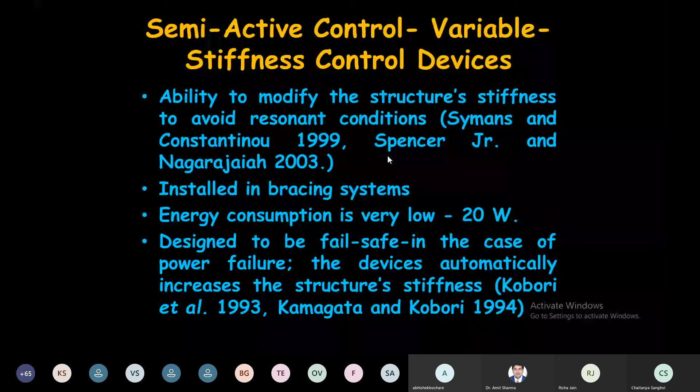Right, we can talk about the system. Basically, this is the electromechanical with a variable orifice valves that is to be used. Right now we don't have time to discuss this, because I want to just go through two parts, that is ER and MR. So I'm skipping some portions, and we come to this part, the semi-active controllable fluid dampers.

Here we have electrorheological and magnetorheological fluid dampers, right? This is very important. These dampers have fluid that has the ability for reversibility and to change their viscosity. They change the viscosity.

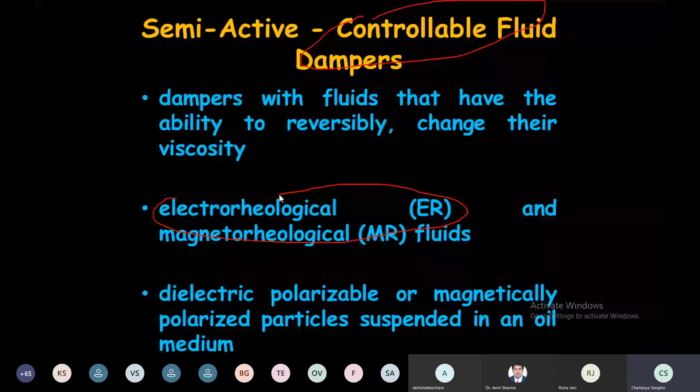Out of this, the electrorheological damper, or ER damper, has a yield stress of 3 to 3.5, so strength is less, and this fluid capacity is greatly reduced by introducing impurities. Suppose impurities are there, it is not effective.

But this MR fluid, magnetorheological fluid, has higher strength, up to 50 to 100 kPa. Impurities will not affect it, and voltage requirement is only 12 to 24 volts, and power requirement is less than 50 watts. So these MR fluid dampers are much better, and I think most of the time it is used.

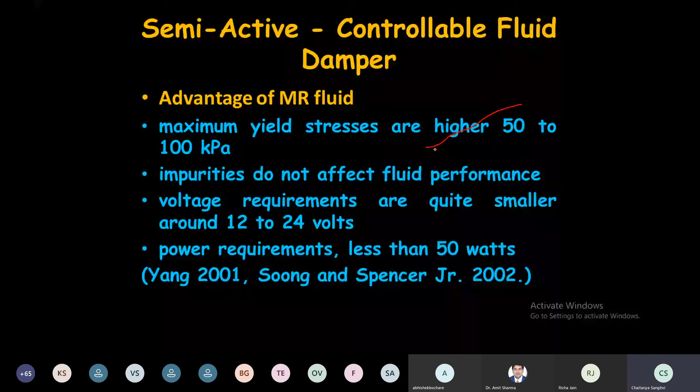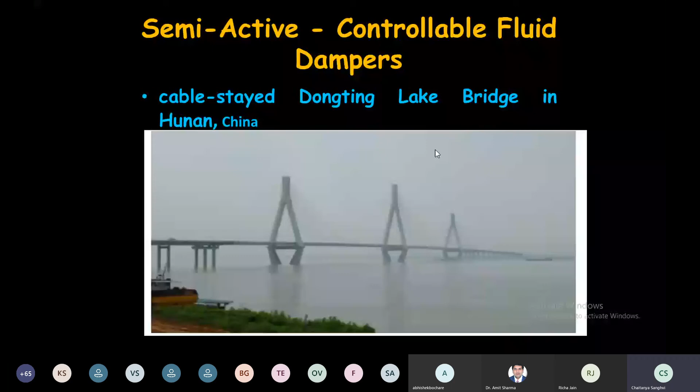So now we go to the conclusion. The use of advanced techniques with sound fundamental knowledge is required. When you use such kind of systems, the important thing is we want a reduction in the response. This is our requirement. And if you introduce anything that increases the response, it is of no use.

So if you have good knowledge, then you apply it. You have to understand the impact and behavior of each and every technique. Every technique has its own advantages and disadvantages. So you have to be careful when you select any particular technique for a specific purpose, and one has to think about the financial aspect also, because it also impacts the project.

So these are the things you have to keep in mind. Sound fundamental knowledge is required, then you go through the advantages and disadvantages of each and every system, and find which is best suited for your particular project. You have to think of the financial aspect also.

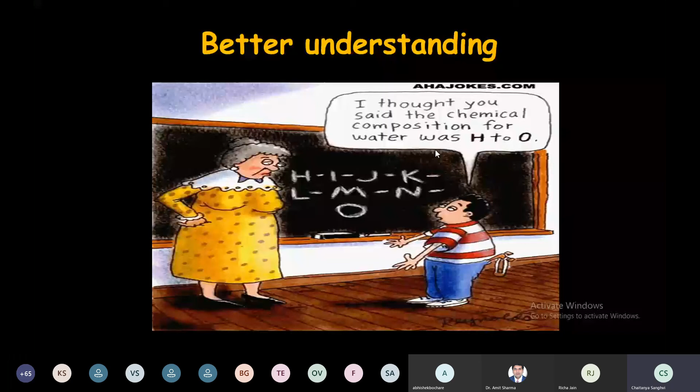So we have to begin with the end in mind: this is my project, these are my requirements, and then I go for such kind of systems. As far as India is concerned, we have to do a lot of things, we have to climb this ladder. We haven't worked enough in the area of earthquake engineering under normal circumstances, and as far as these advances are concerned, I think we are almost near zero. We have not used these systems at all in India. So there is a lot of potential, I tell you. If you people work in this area, a lot of potential is there, and I think we can do much better in future.